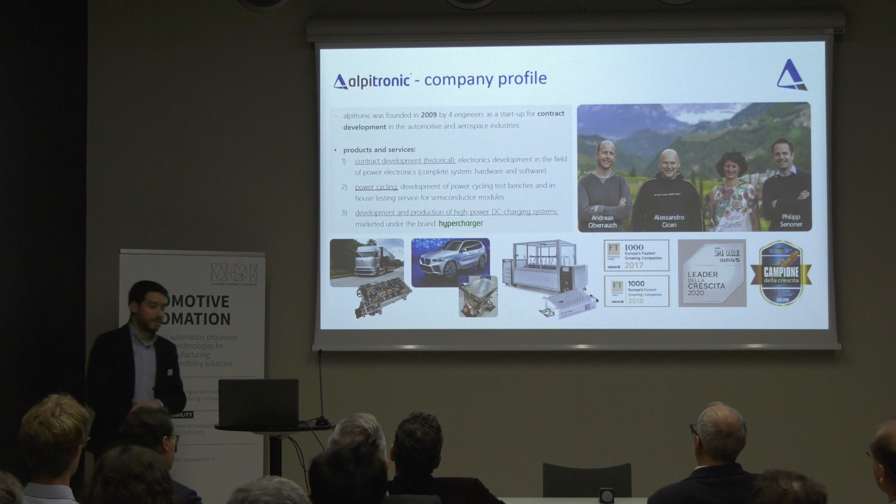Since 2017, Alpitronic is mainly focusing on the development, production, and selling of the hypercharger, which is our main product. In the meantime it became a product family - we have three different power levels: 50 kilowatt, 300 kilowatt, and 400 kilowatt. We will see that later.

We are now selling that currently all over Europe. We are now completing the certification of our chargers for the US market as well, which is why we founded the headquarters for Alpitronic US a few months ago. In Europe, of course, our headquarters is in Bozen with the production repair center and the central warehouse. All the R&D is also in Bozen, with two satellite offices, one in Munich and one in Bologna. In Bergamo, we have a remote support center as well.

Some numbers: we are currently over 800 employees. We're trying to be a 4-digit number of employees within the end of this year. As you can see, since we started the hypercharger product in 2017, more or less every year we managed to double the number of employees, mainly due to the high percentage of employees in production.

Here is a very high-level overview of our product. This is the hypercharger, which you can currently get on the market in two power ranges. One is the 300 kilowatt, which uses the old IGBT technology, and one the 400 kilowatt, which uses silicon carbide, which has been on the market for a few months.

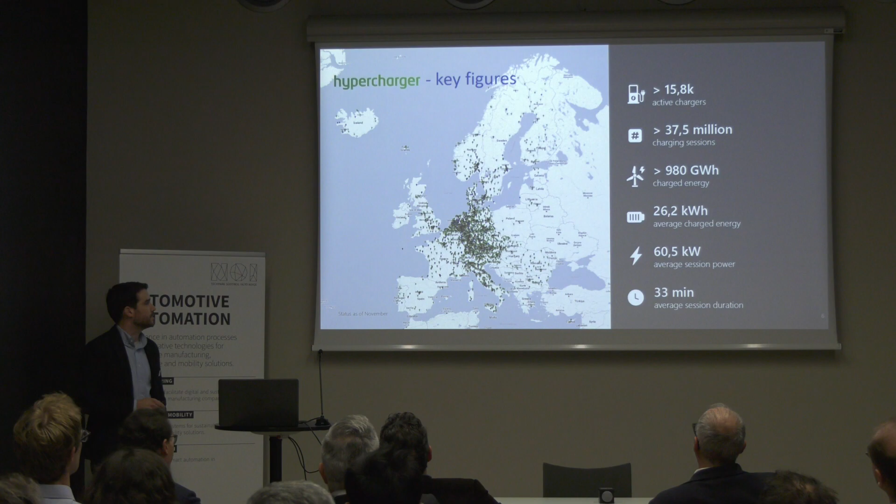I think as this slide is a few weeks old, we reached the magical number of 1 terawatt hour of charged energy since we started this adventure with the hyperchargers.

So getting to the point: thermal management. I have 3 slides on why this is important for the EV charging infrastructure, and I have 4 main reasons why the market requests a solution for efficient thermal management.

First of all, volume, power density, and weight. The market requests compact charging solutions. Space is limited everywhere, so one of our big unique selling points is that we have very compact chargers. They are, let's say, half of the volume compared to the power density of other chargers from other competitors.

And if you have a look at the physics, the 3 physical laws which define how you get the heat out of your power electronics, they all have one thing in common, which is the surface. So if you want to get smaller, you need to take this into account. If you have a certain power loss and want to get rid of it, you might think you need to increase the surface to get bigger. But if you do the math and calculate the power loss density, if you want to get rid of a certain power loss density and optimize it, you actually need to get smaller. This is the task, and this is the difficult thing in thermal management.

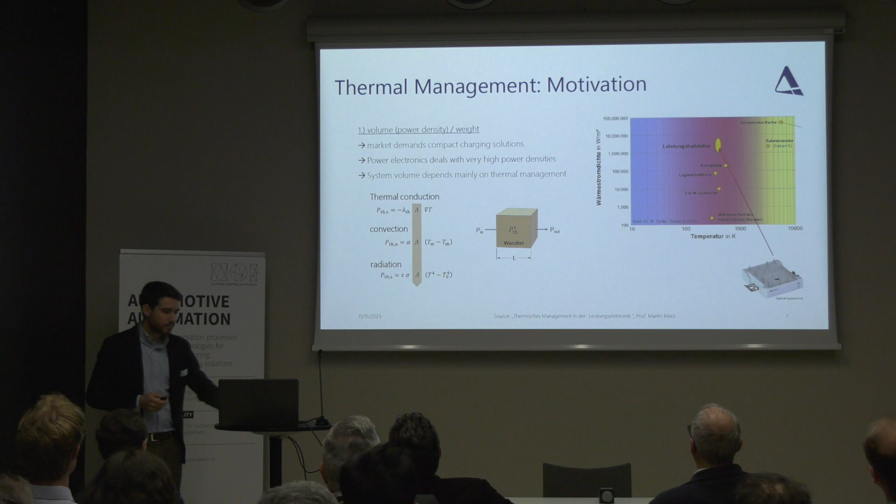Second, a very important topic for why thermal management is important is efficiency. The market demands high efficiency. Basically, our customers, which are the operators of the chargers, buy the AC current from the energy provider, and they sell DC current to the drivers. The power which is lost in the conversion is basically their operation cost. So the better your efficiency is, the better it is for our customers, the more money they can save. Now, if you have a look at most of the loss physics, you can see that losses increase with increased temperature.

This is, of course, the reason for the thermal runaway of most components. For example, the resistance of those silicon carbide transistors increases with increasing temperature. So you really need a good thermal management in order to keep the transistors cool, also in order to keep the efficiency high. And of course, what we try to follow is: the best thermal management starts with the first step, which is avoiding power losses.

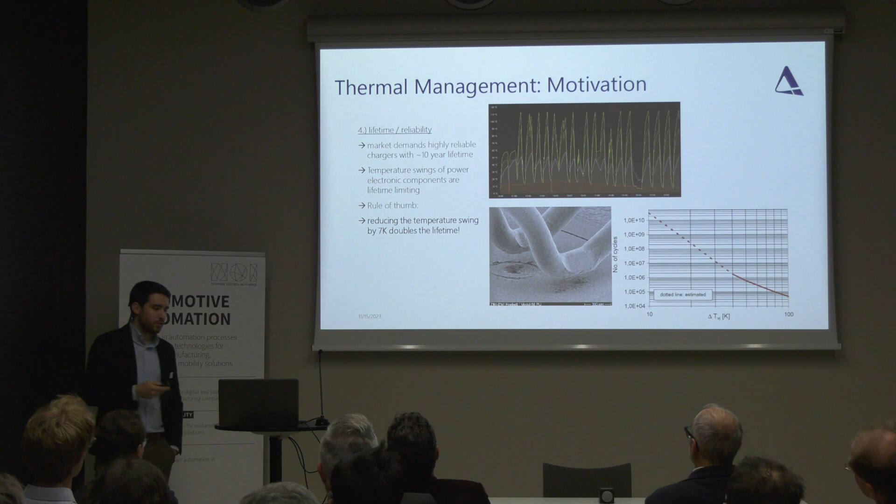These thermal swings add up and somehow limit the lifetime by defect mechanisms, such as the bond wire liftoff inside the module. I think I've seen this in a slide earlier. A rule of thumb is if you are able to reduce this temperature swing by 7 Kelvin - I think in the slide earlier I've seen 10 Kelvin - you can double the lifetime of such components.

So I try to give you a very high-level overview of how we tackle the thermal management, the thermal design of our power electronic converters. Our first step is, of course, we need to identify heat sources. So what are the heat sources? I mentioned earlier, 2/3 of the power losses are made in the power electronic component.

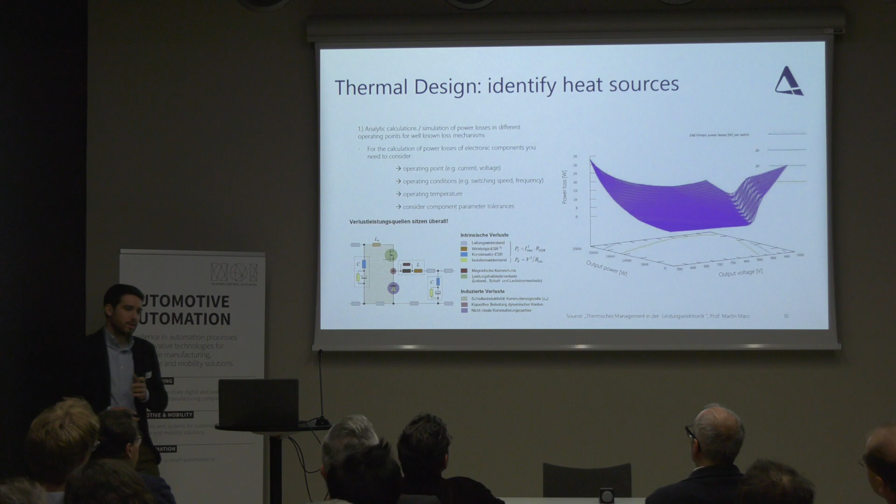Now, usually what you do is calculate, with a mix of analytical and numerical simulations, the heat or the power losses of the semiconductors for all the combinations of different operating points - in this case, output power and output voltage. You have to do this very carefully and include really all the operating points, because here you can see that for this module, the worst case operating point is not at full power but close to zero power, which means you really need to take into account all the different operating points.

And the difficult task in power electronics is, of course, the power losses which are made by parasitic components, which maybe at the moment you are designing your system are not well known. So this is something you usually identify very late in the development phase, and this usually causes a lot of trouble too late in the development phase.

This is why we usually try, at very early prototype stages, to see if our calculations, our simulations of the heat sources, also of the power losses inside the main components, if we calculated them right. And this, of course, we need to do with measurements. So we compare our simulation results with measurement results.

For example, in this case, I showed you the temperature, maximum temperature of the transistor in the different operating points. The lines are the simulated results and the dots are the measured results. And in this case, we were able to get simulation and the reality within a very, very reasonable distance.

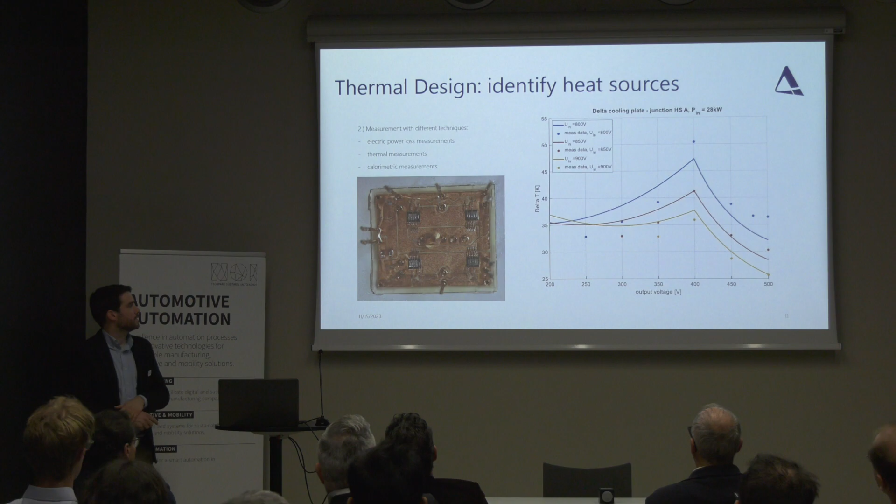And after you identified the heat sources, of course, the main task is to dimension the heat sink and cooling paths. In this case, we usually use simulation tools, in this case ANSYS, to simulate temperatures in real operating conditions.

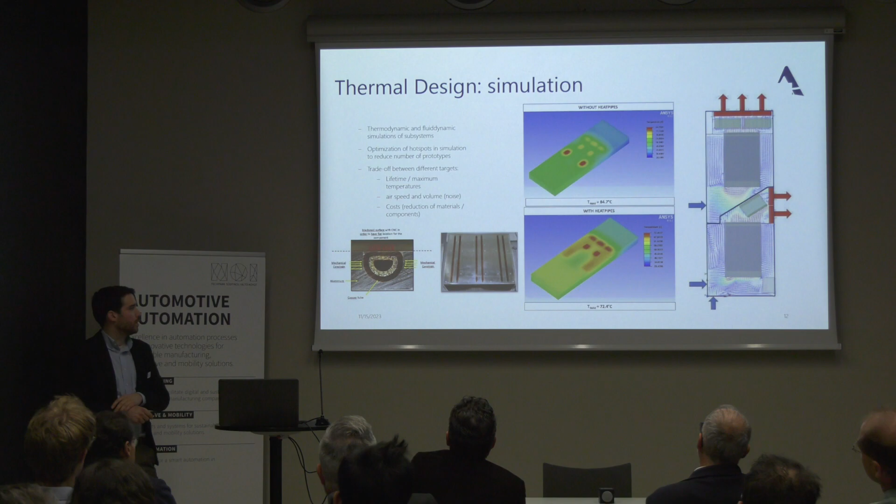What I show here is the temperature of a heat sink, and in the first simulation step we saw that the maximum temperature of a module like this exceeded the maximum allowed temperature of, in this case, 80 degrees. What we did is we introduced heat pipes, and through optimization of this design in simulation we were able to show that by introducing heat pipes we decreased the maximum temperature of the components by more than 10 degrees, which then satisfied our requirements, and with this design we then went into production.

Usually we do this with thermocouples or with infrared cameras, and these tests are then the input for the redesign phase, where you try to optimize the thermal behavior of components which exceed or are close to their thermal limit.

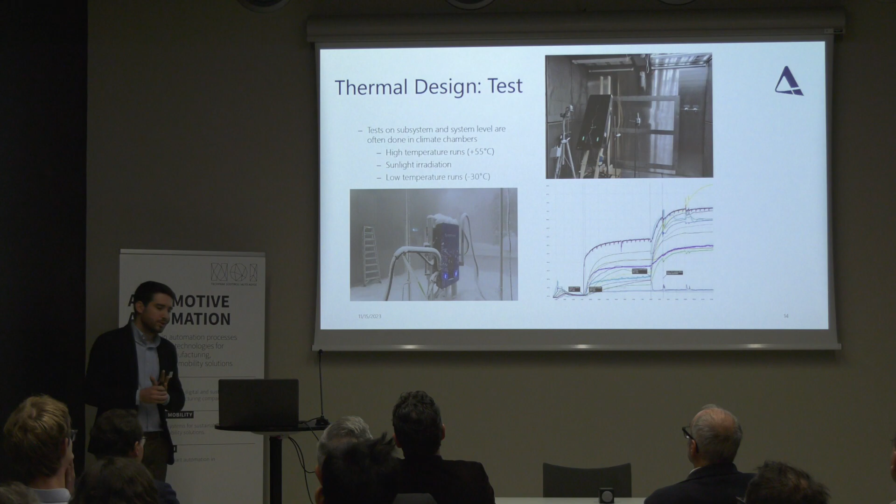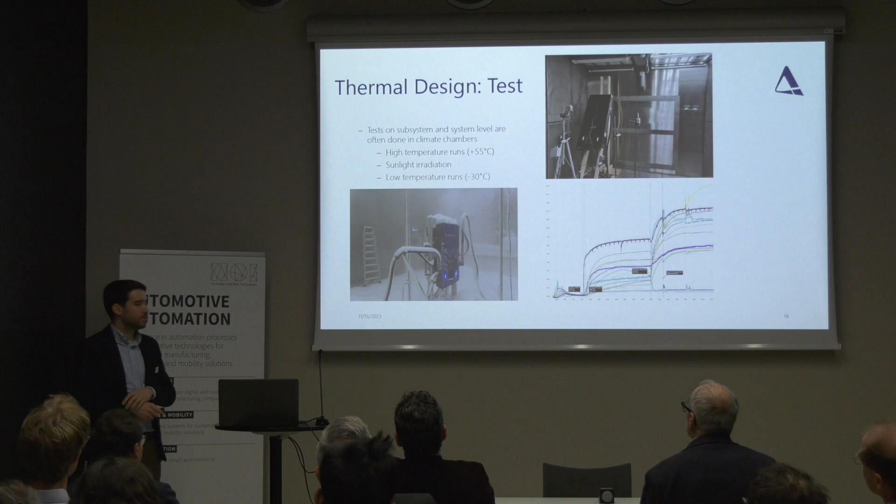This test we did in the big climatic chamber of the NOI Techpark. What usually happens at cold starts is you have to make sure that all the electronics wake up properly after a cold night, after snow, after heavy rain. This is also quite an extensive test we need to do at the end of our design phase.

I think this was the last slide.

Okay, thank you for the nice introduction. My presentation is slightly different from the others because I'm going deep down in details, and I'm going to speak about the design optimization of PCBs through numerical simulation.

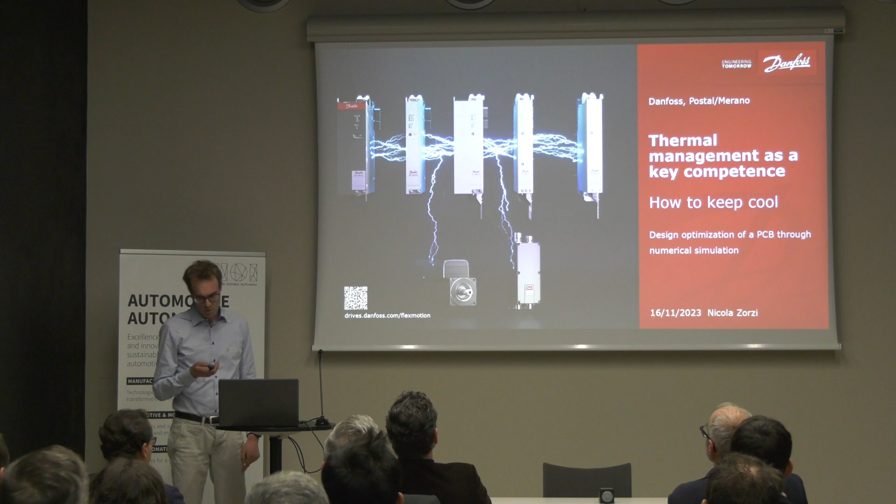But before starting, let me spend a couple of words on Danfoss. Danfoss is a multinational company based in Denmark with more than 42,000 employees globally. Danfoss has 3 segments. The first one is power solutions, which mainly designs and produces hydraulic pumps, hydraulic motors, hydraulic steering systems. The second segment is climate solutions, focused on heating and cooling buildings, designing and producing valves, compressors, heat exchangers, components for heat pumps. And the third segment is power electronics and drives.

One out of 17 factories is placed in Merano, and there we are responsible for the whole process from the idea, the concept, to the serial production of drives. We are specialized in drives especially for the food and beverage industry, different from the automotive industry, and our amount of production is more than 70,000 drives per year.

Okay, so let's go on. Let me introduce the topic and a brief introduction of the methodology we used. I'm going to speak about a problem we dealt with. This is a servo drive. This part is the motor, and this is the electronic part, in which the power board is placed. The power board could be considered the heart of the drive. In the power board, we find these two connectors here that are important for this study, because the first functional test on these drives failed due to excessive heat temperature on the M23 connectors.

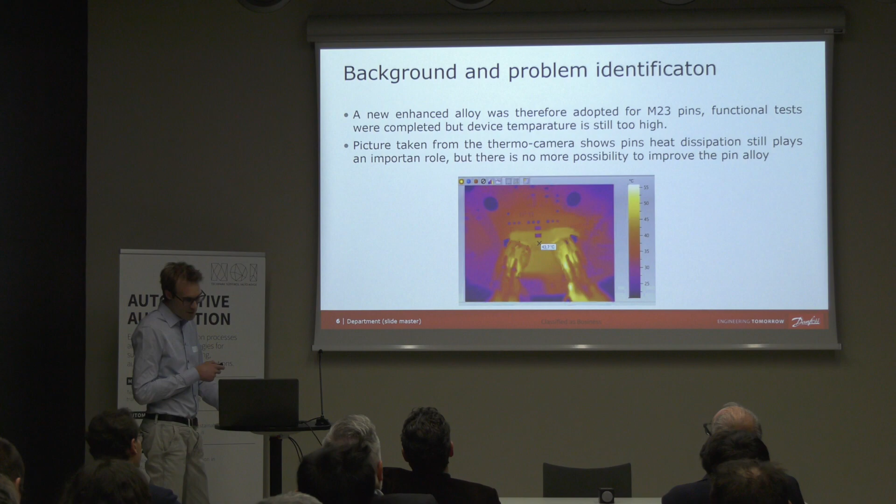Unfortunately, we have no more possibility to improve the pin alloy. So what we did, we used thermal simulation to understand the problem, to understand where the problems are.

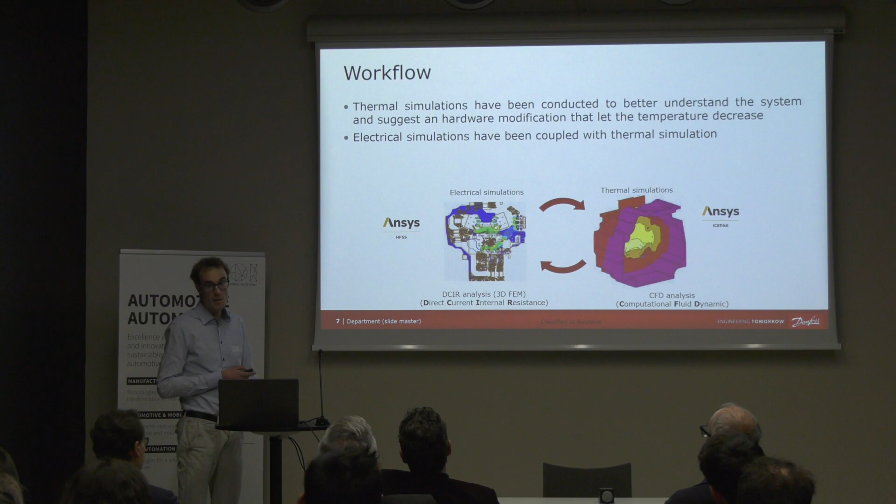And guide the design process to a temperature decrease. In this case, electrical simulation has been coupled with thermal simulation. We used the ANSYS suite for both electrical analysis and thermal simulation. We coupled these two software until convergence is reached, because for the CFD simulation we need the power loss from the electrical analysis, and the electrical analysis depends on the temperature that is an output of the CFD analysis.

This is the computational model, so we can see the various layers of the PCB. Here we can see the nets, and regarding the boundary condition, an appropriate continuous current was imposed on the printed circuit board. Regarding the computational model of the thermal side, it's possible to see the case.

So the aluminum case, this green is the power board, and this is the module. It's possible to see here in detail the module with the 6 chips that dissipate power. And this is the power board.

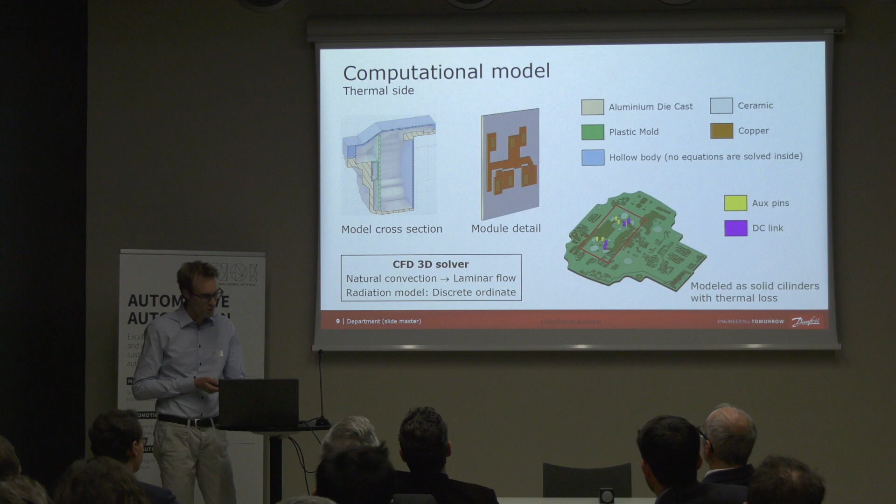And since the pins are important for heat dissipation, here pins are modeled as cylinders with thermal loss. We are in natural convection, so laminar flow was chosen, and we also consider the radiation model.

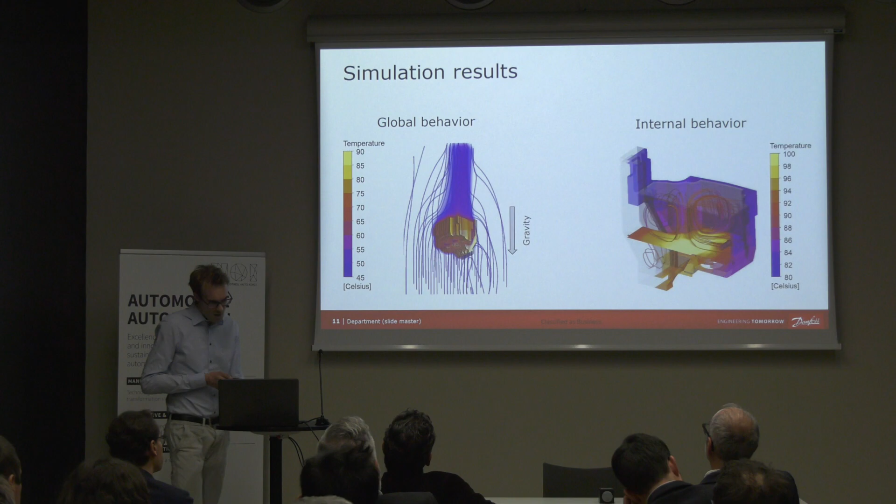And this is the output from the electrical simulation. So we can see where the problem is. And with simulation, it's possible to understand how big the losses are inside the power board.

We can see here that the losses inside the power board are comparable with the losses of the pins.

Regarding the CFD analysis, the temperature of the power board is found, and we can see how the high temperature is placed between the M23 connector.

And okay, this simulation, as I said before, the main purpose was to validate the simulation. And these in this table show the simulation output compared with the test. So we have good correlation between the two tests, so we can consider the simulation correct, and we can proceed with further improvements.

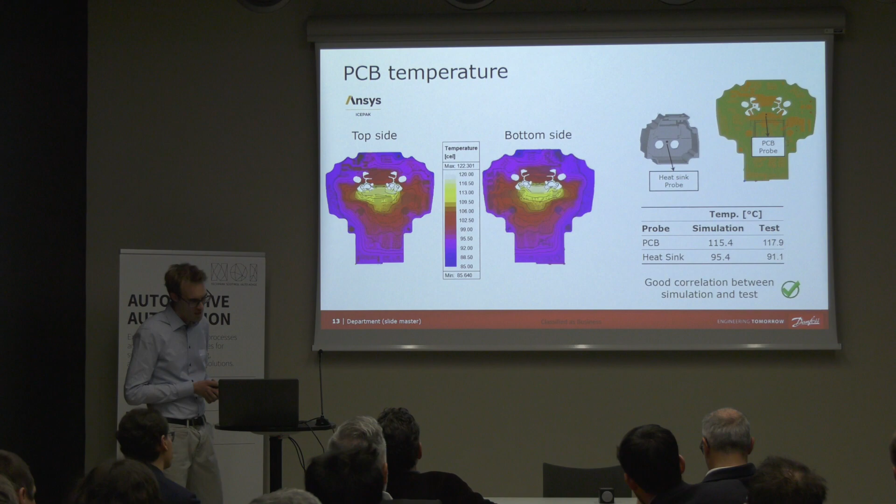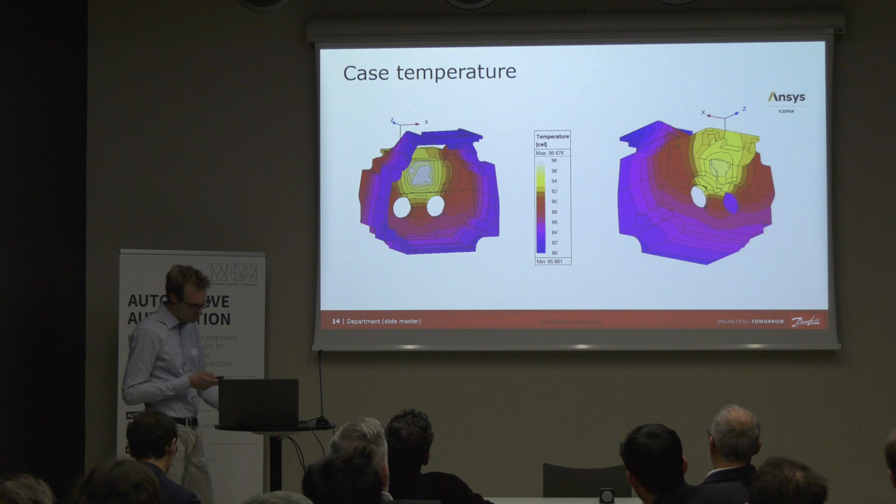So now we can proceed with improving geometry, and several geometries have been studied. In this case, to enhance the thermal dissipation, a thermal pad was placed between the M23 connectors.

So basically, these are some of the geometries we studied. The first, a small thermal pad was put, and then for version 3, a bigger thermal pad. We would like to understand

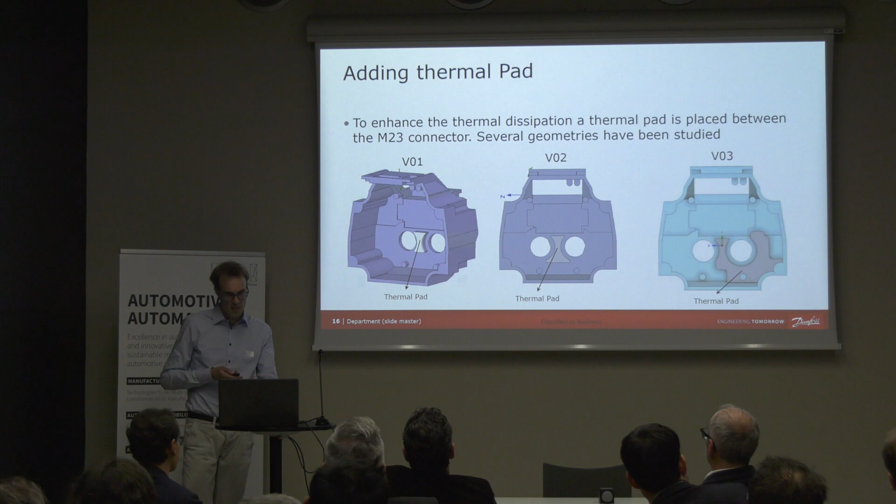the contribution of the thermal pad. These are some pictures that show the coverage of the thermal pad on the PCB. Basically, the V03 is much bigger than the other, but mainly covers the green area that does not dissipate power.

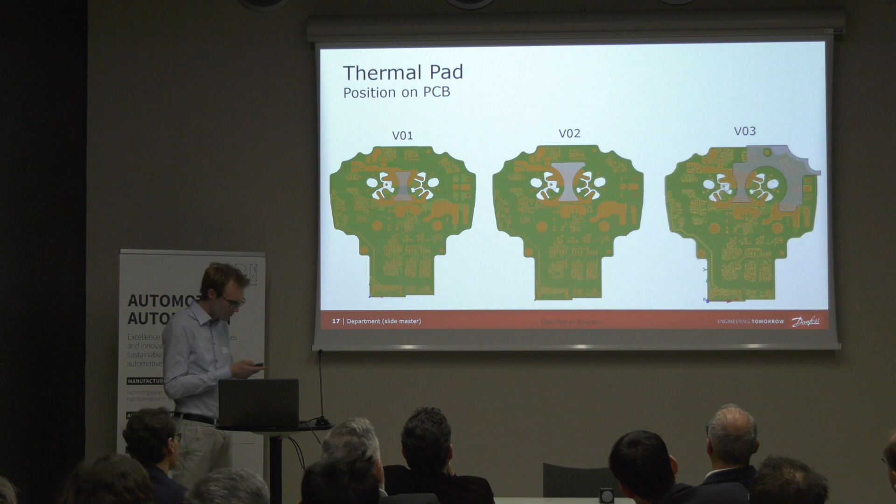Okay, here we can see the temperature of the PCB. So it's possible to appreciate how the temperature is reduced between the connectors because of the thermal pad.

So before the thermal pad we have something like 110 degrees, and now the temperature is reduced to 95 degrees, more or less.

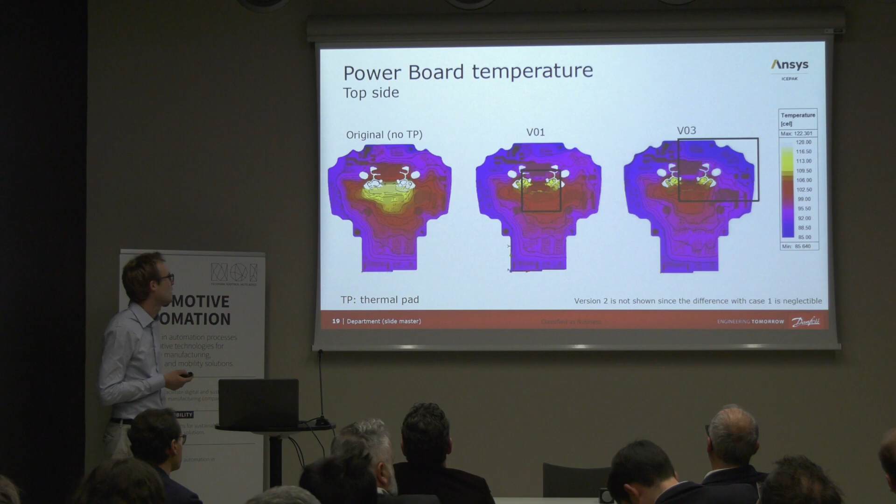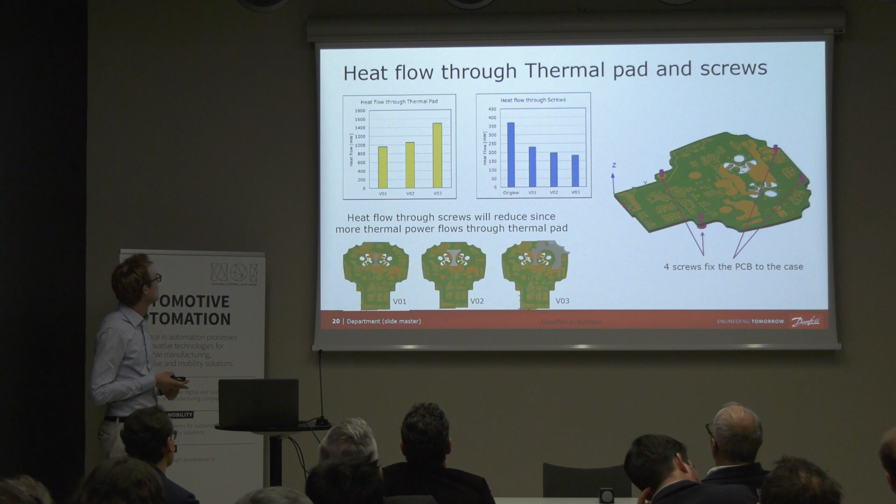Thermal analysis has the advantage of finding some quantities that are impossible to find during the test. For example, it's possible to understand the amount of energy, the heat flow that passes through the thermal pad and the heat flow through the screws.

And this was important for the next step, because as sometimes happens in this industry, after some weeks it was necessary to review the entire layout because of mechanical constraints and because of new functionality requirements.

So in this case, simulation was used to guide the design of copper traces. The aim was to conduct more heat through the screws and to design wider copper traces to transport the heat towards cold zones.

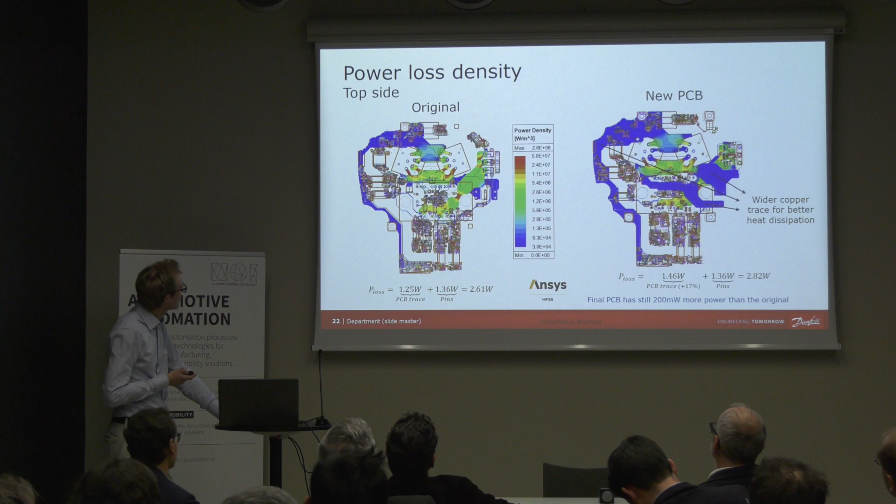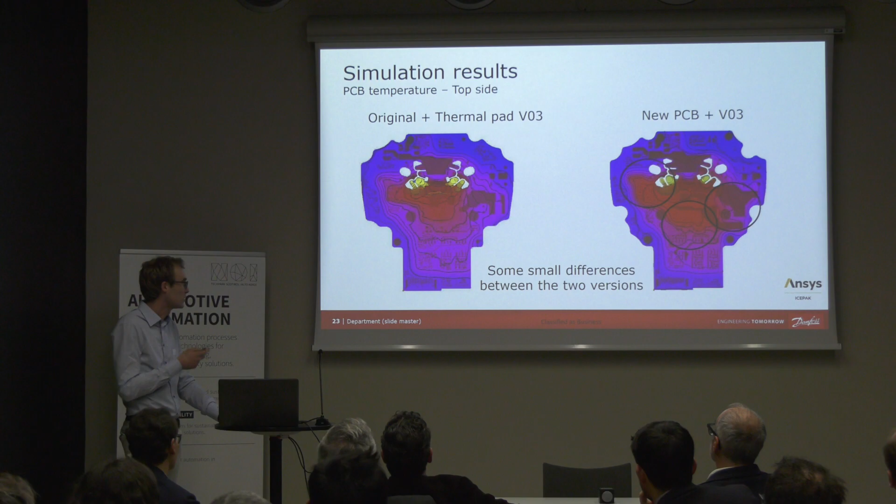The new power board has, for that new functionality, 200 milliwatts more power than the original, but as we can see in the next slide, the temperature between the two power boards is the same because of the methodology we used.

Now let me finish my presentation explaining the final test verification that checked if the simulation was properly done. So a preliminary test was carried out to verify the simulation. Preliminary because this power board doesn't have the module that is placed here, and also the ambient temperature was 30 degrees and not 45 degrees. This is because the main purpose of this downgrade is to speed up the time of the test.

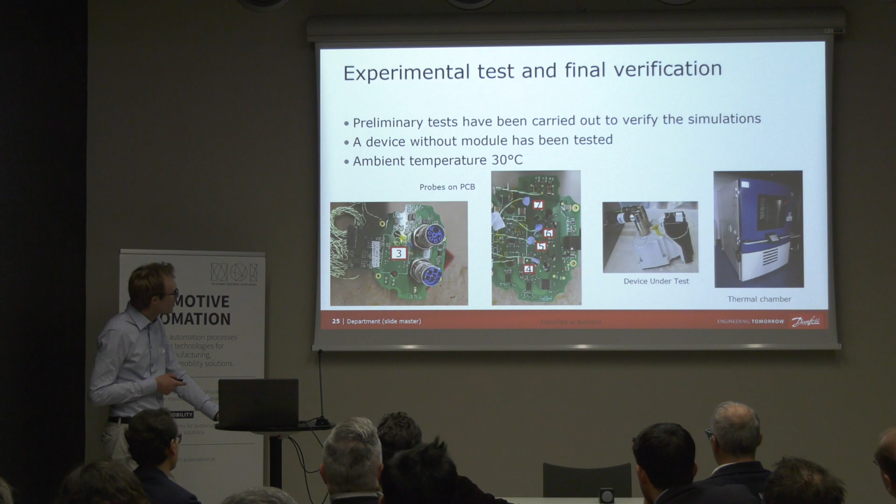So some probes were put on the power board, and this is the device. You can see here the module does not exist, and this device was put in the thermal chamber. The results were okay because the temperature reduction is about 13%.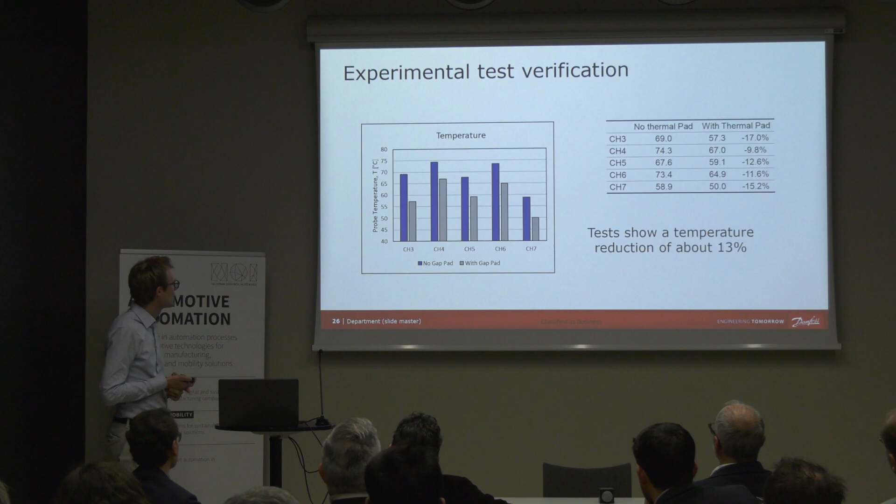So we can conclude that virtual simulation permits us to predict the thermal behavior of the device, and in this case, electrical simulation coupled with thermal simulation permits us to estimate the temperature of the new geometry, limiting the number of experimental tests and developing time. For example, for this work, 3 weeks for simulation were needed, while 1 week for the final testing.

So we can see how the simulation reduced the development time a lot. This is then my presentation. Thank you for your attention.

Thank you so much, Johannes, for your introduction. Let's talk about thermal management, but thermal management driven by simulation. How to solve the problem of thermal management and heat exchange, and optimize or improve thermal management problems.

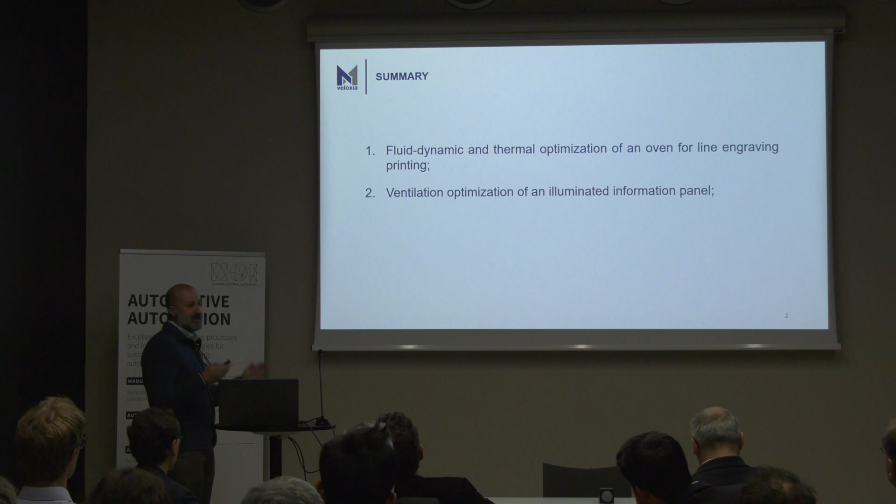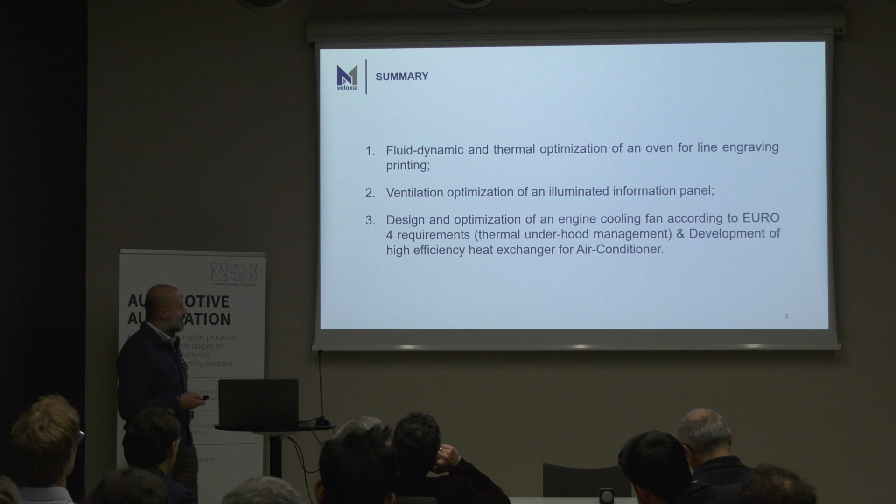Let's go on. I will talk basically about two works that I carried out in the recent past. The first, the fluid dynamic thermal optimization of an oven for line engraving printing, and ventilation optimization of illuminated information panels—the panels you see along highways, in train stations, in airports, and so on. At the end, I will talk very quickly about improvement of a cooling fan for thermal underhood management.

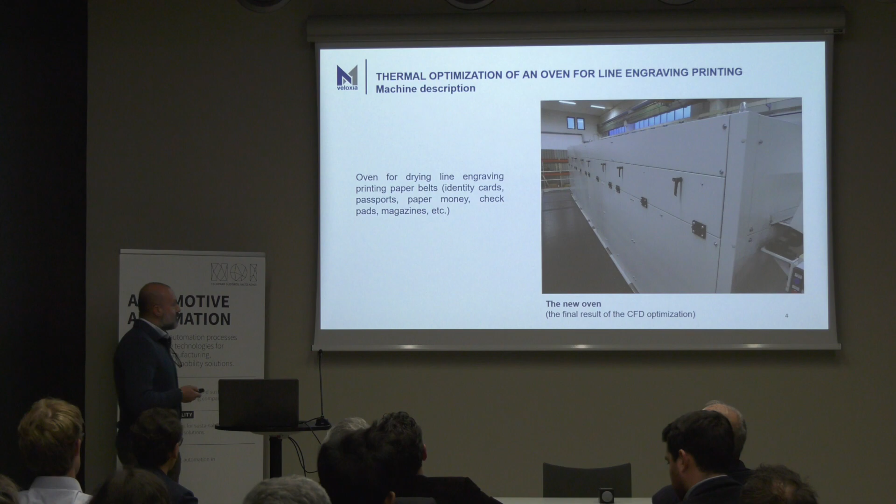Let's start with the first work. I'm talking about the oven used to dry out paper with fresh ink. Machines that print, for example, money, documents, passports, and so on have fresh ink over the paper. The paper enters the oven, is dried up, and then is wrapped up at the end. This is the final model of the oven that we worked on.

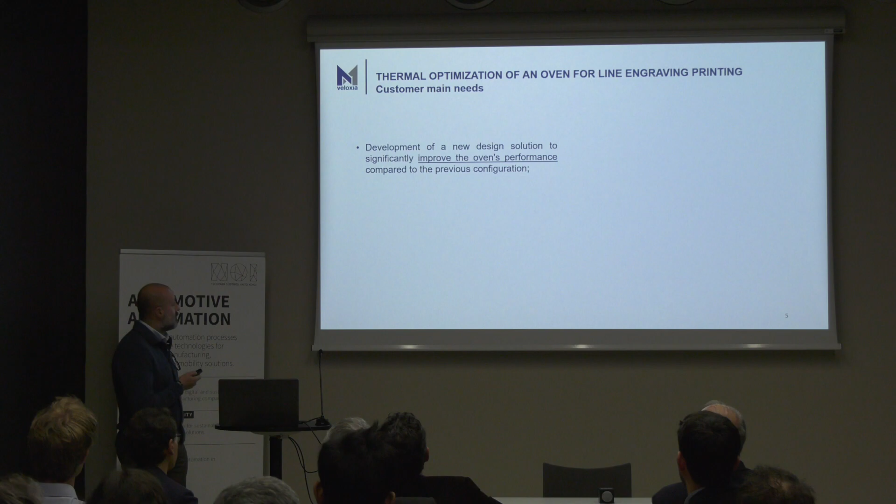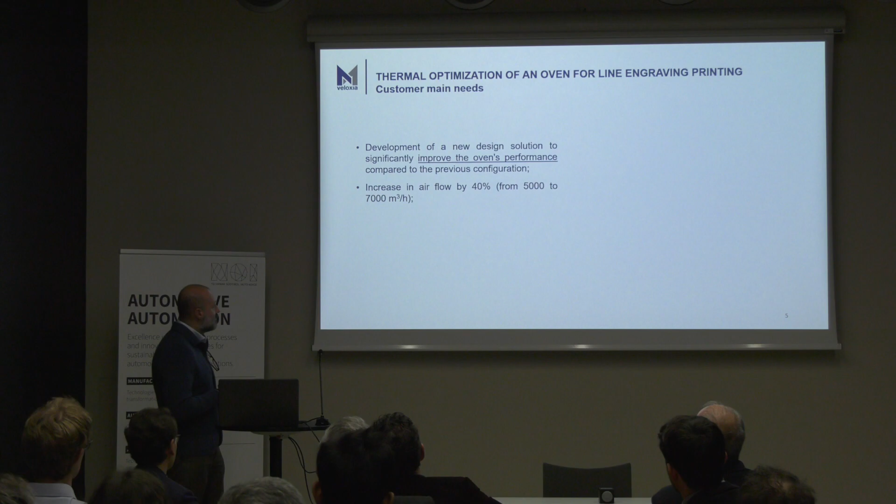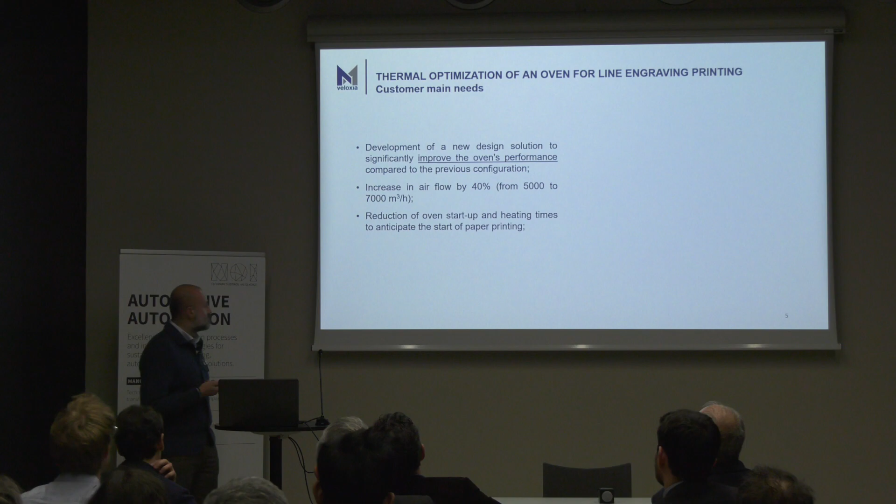What was the customer's main need, the pain point of the customer? To develop a new solution to improve the performance of the oven, because they wanted to improve the profit and performance of the machine. First, increasing the airflow rate, because they wanted to increase the speed of the paper into the oven, so increase the flow rate of hot air that has to dry up the paper, and reduce the startup and heating times to anticipate the start of paper printing.

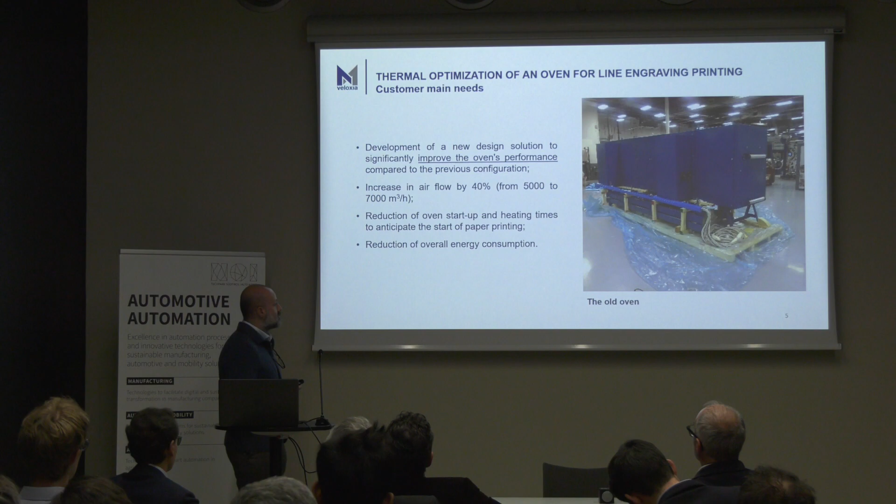At the beginning, it took about 40-45 minutes for the warm-up of the machine, of the oven. So every morning, when they switch on the machine, they have to wait almost 1 hour before starting printing, because the oven took too much time to warm up. So this was another pain that the customer wanted to solve.

Other problems included a high pressure drop of the air moving into the oven. This meant that to move the air, they needed high and strong fans with very high power absorption, and they were very noisy. Moreover, there was a non-uniform distribution of the air.

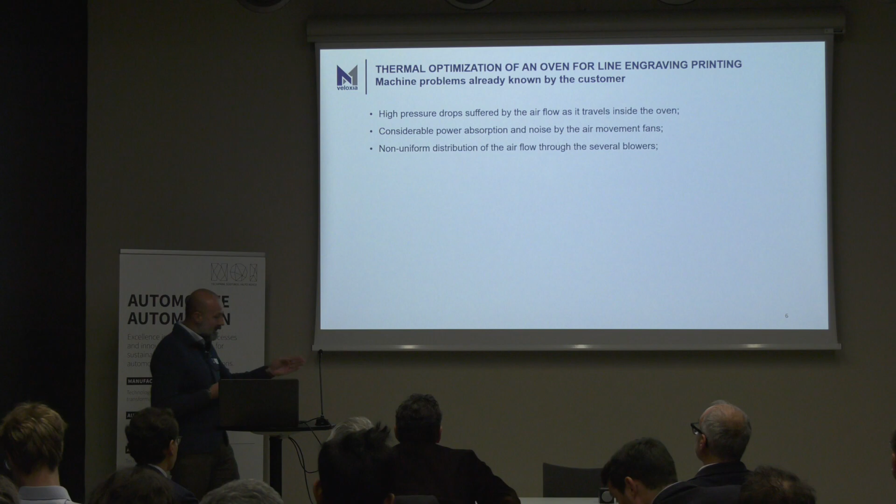The air flowed through several nozzles impinging on the paper moving in the oven, so a better distribution of the air through all the nozzles of the blowers was needed. As I told you before, there was also a long time for warm-up, and a daily delay in the start of the printing process.

So with reverse engineering, we created a 3D model of the original oven, and we created a CFD model of the machine that we analyzed.

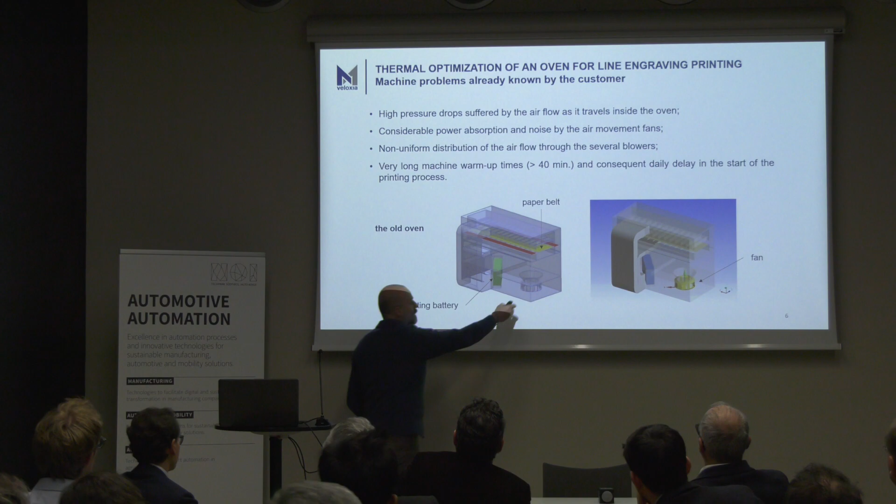What we found out, first of all, going back for a while, was a bad design of the fan that moved the air. That was a reason for the high absorbed power and the high noise produced.

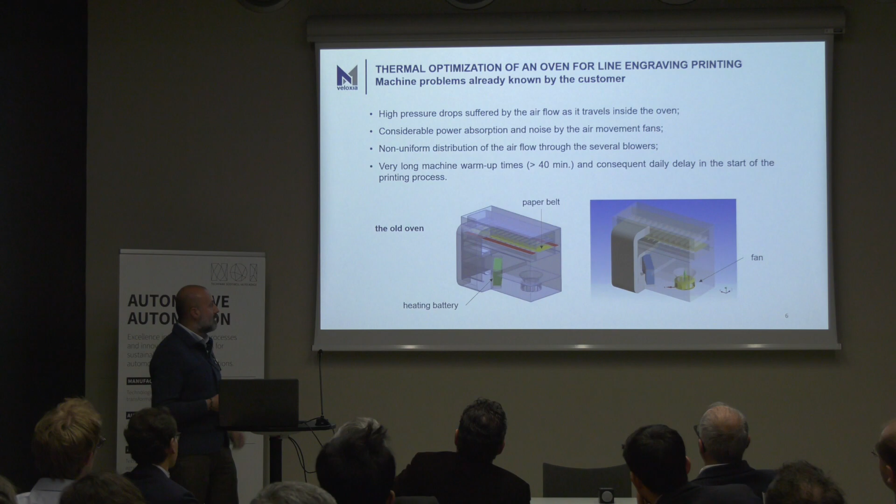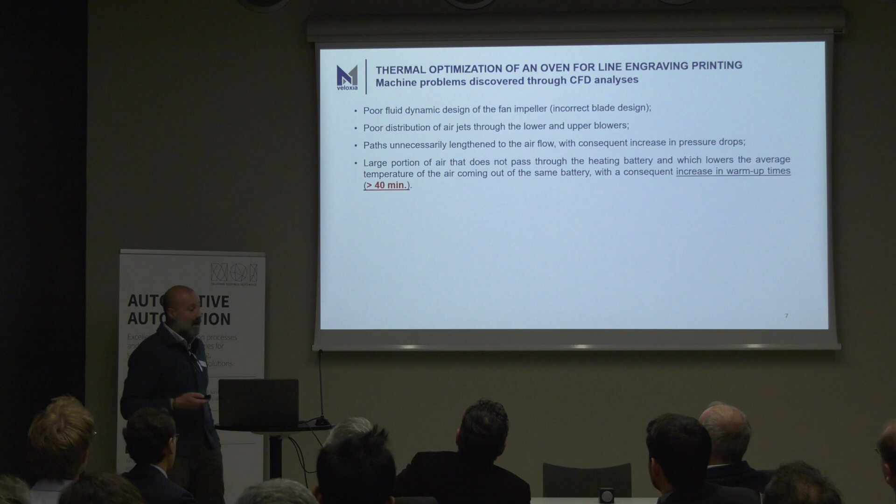And there was a path unnecessarily lengthened for the airflow. We noticed that the air took a useless path, with high pressure losses, and also high vortices and turbulence that caused further pressure losses.

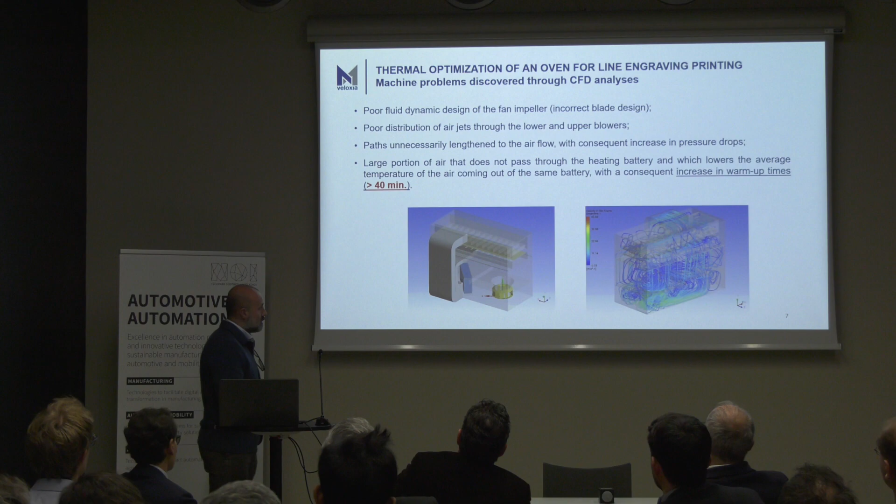We also noticed that not all the air went through the battery that had to dry up and heat up the airflow. So the original design was bad.

So what we did is we started with a new design. We forced all the air to go through the battery, so all the air at every loop was heated by the batteries.

We were able to reduce the pressure losses of the air through the oven, and so we could move a higher airflow rate with a smaller fan, with less power absorption, and quieter fans, also with a better distribution of the air through all the nozzles of the oven.

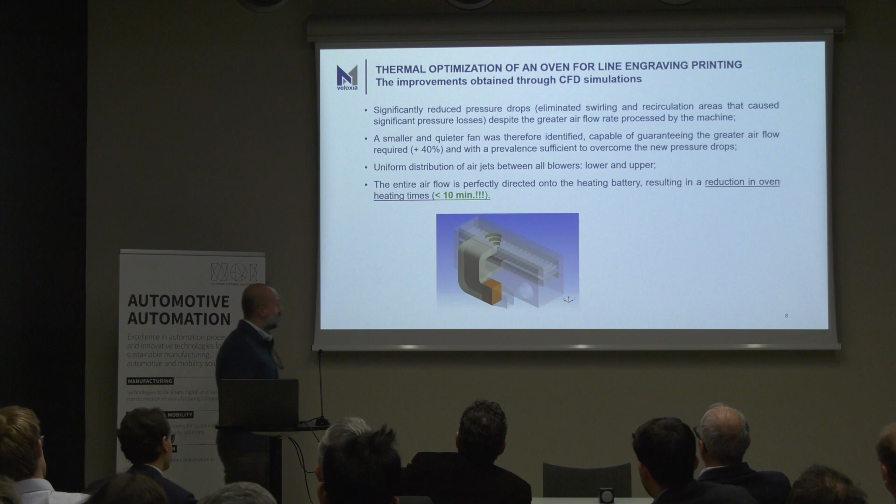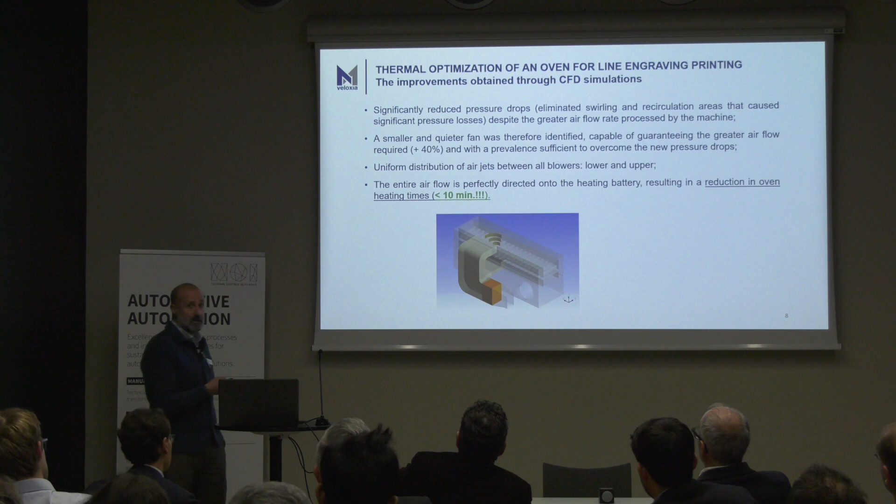We also significantly improved the warm-up times, highly reduced from 45 minutes to less than 10 minutes. So every morning with the new machine, they could start printing early.

So what we had is an anticipated start time for printing from 45 to 10 minutes, which is more than a 75% warm-up time gain.

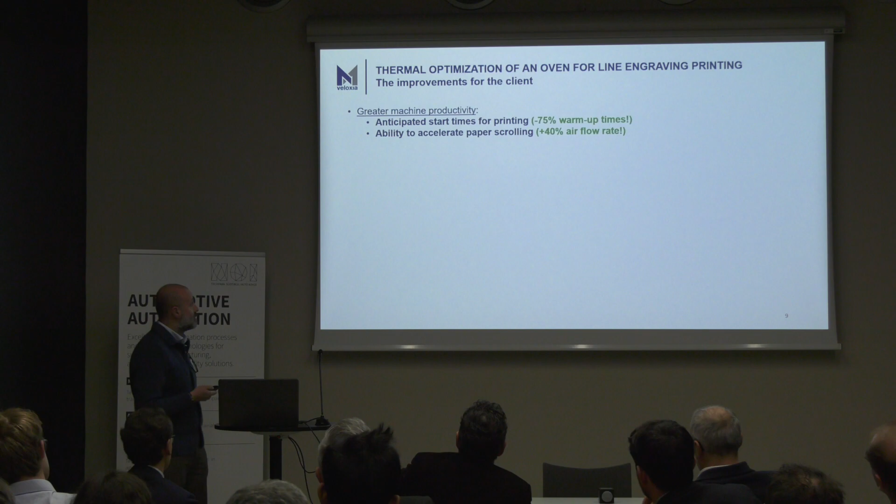There was also the ability to accelerate the paper scrolling through the oven. With the increase of the flow rate, of course, we could increase the velocity of the paper through the oven, and so we could improve the productivity of the machine.

And as I told you before, we have a significant reduction in electricity consumption cost for the fans, because we used smaller fans, and for the heating batteries. And of course, with smaller fans, it means also quieter fans, so less noise.

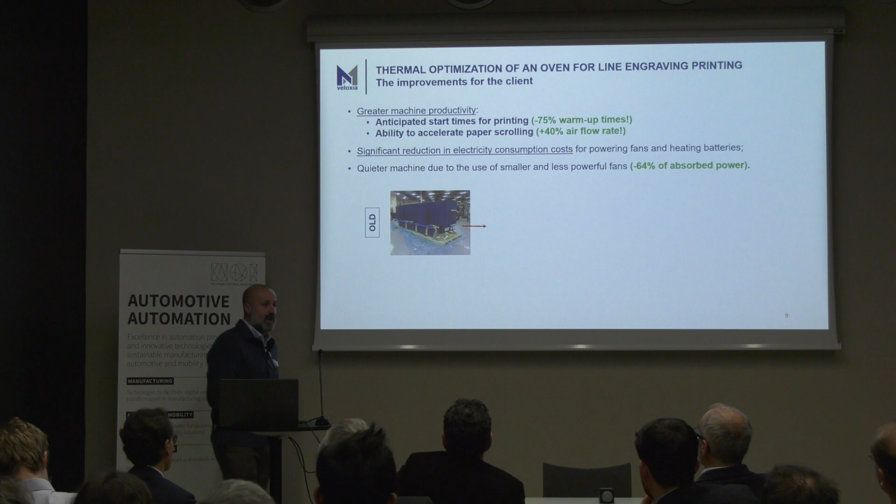So now the workers don't have to cover their ears as they did before when the machine started, due to the very high noise. This was not needed anymore.

So we started from, as I told you before, this is a small recap: the old machine, the 3D model, the CFD model, and the CFD simulation of the old design showed bad performance, so we moved to a new design, a new model.

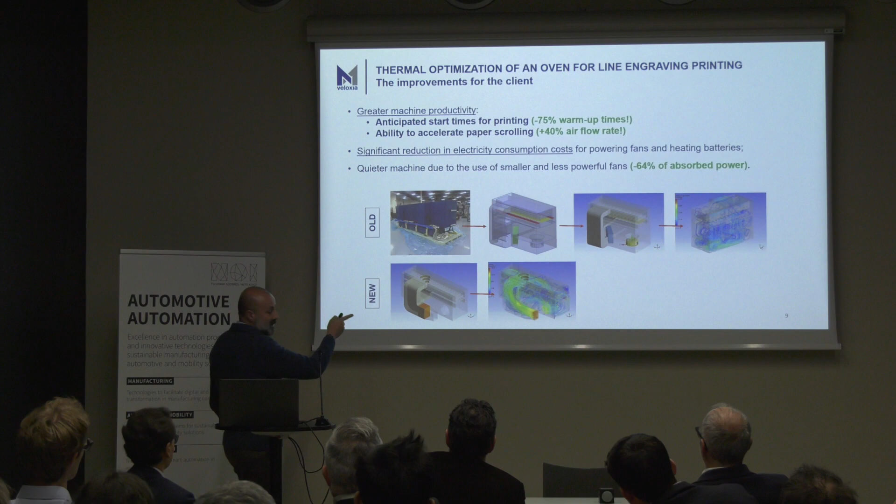The CFD simulations confirmed the improved performance, and then we realized a new 3D model, a new design, and this is the new oven that is now working fine and properly.

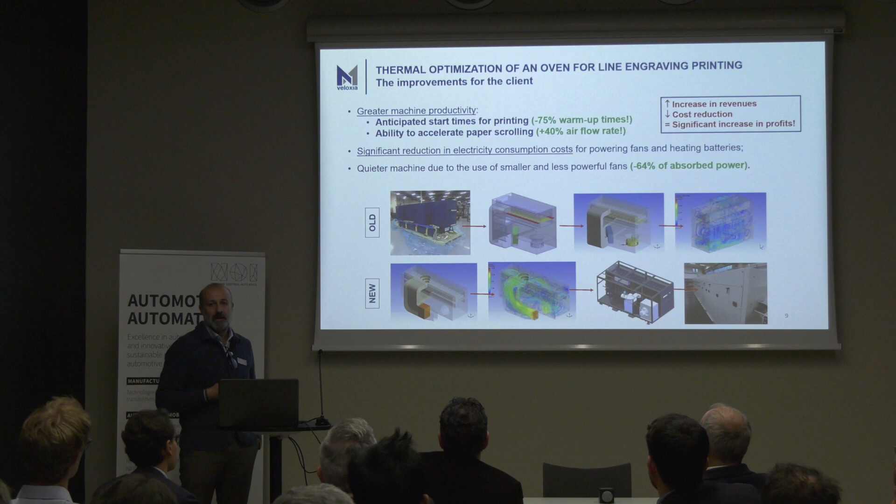Of course, these sentences and words are good for company owners and top managers who are not so technical, they are not engineers like me, but they love those words: increase in revenues, cost reduction, and significant increase in profits. So this is an important result of improvement and optimization of thermal management, but in terms of money.

The second work is the ventilation and optimization of illuminated information panels. I'm talking about those panels.

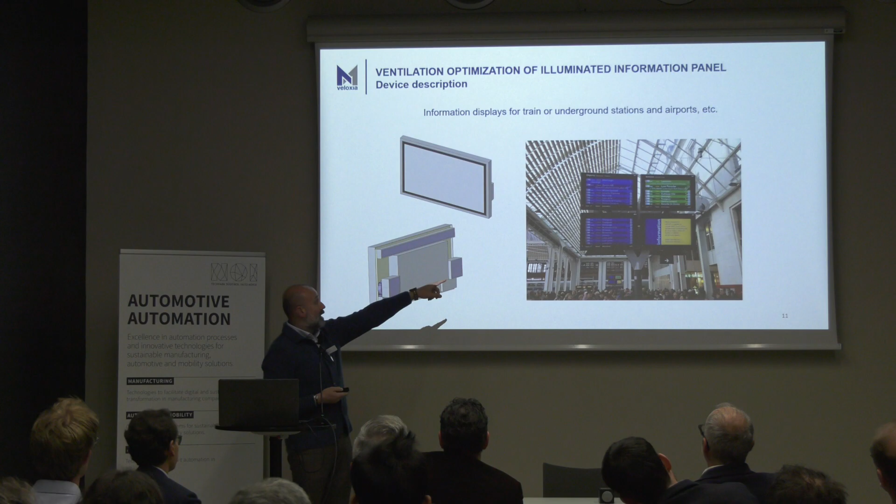In this case, what we found out: the client designed a new model of display with good resolution, very good performance, very light, and so on.

But when they tested it in the laboratory, what they found out is that the center was clear, but the sides were dark. Why dark? Because the sides were hot. And when the monitor, the display, is not ventilated very well, where it is hot, it becomes dark. And this is a problem.

They were about to sell the new display, the new monitors, in the Middle East, because they had already signed the contract. They had to stop delivering these panels, the displays, in those countries, because they first had to solve this problem.

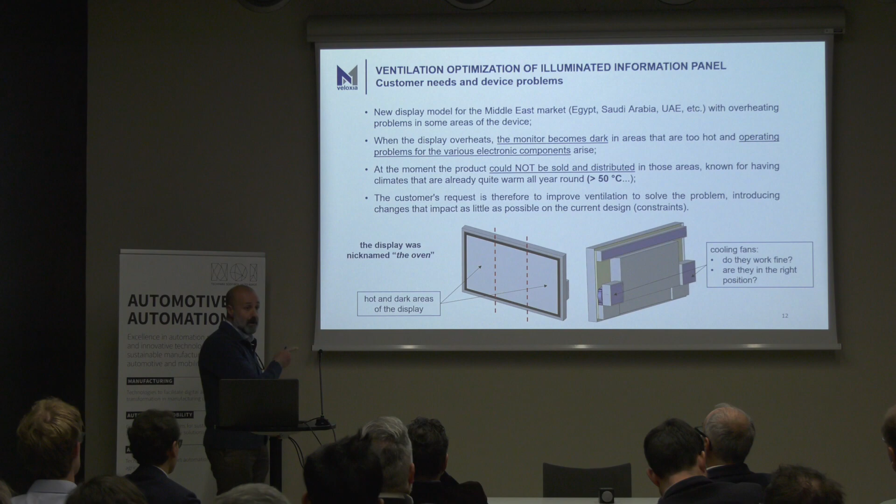And they asked me, they said, Fabio, why did we put the fan, the cooling fan there, but the sides are so dark and so hot, and only the middle is light?

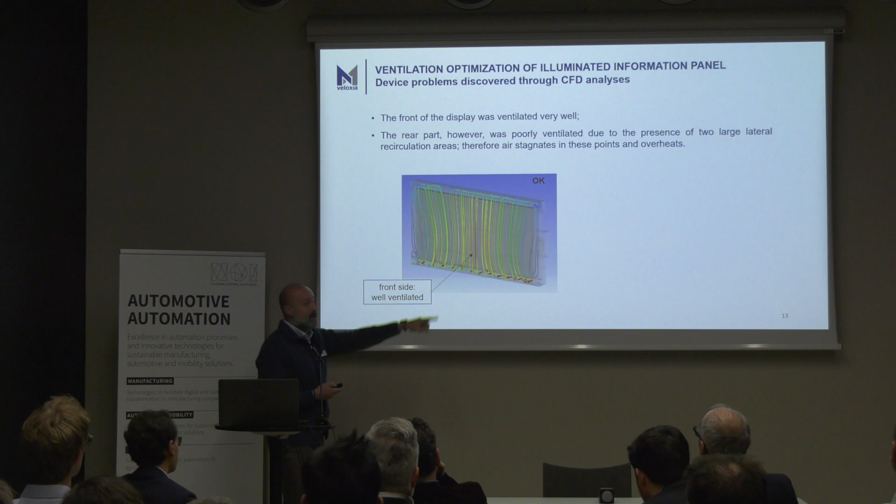So we start analyzing with the CFD simulation the panels, and what we found out is that the front was very well ventilated, as you can see, but the back was badly ventilated. In the middle, the center was very well ventilated, but the sides had these two large vortices with stagnation air.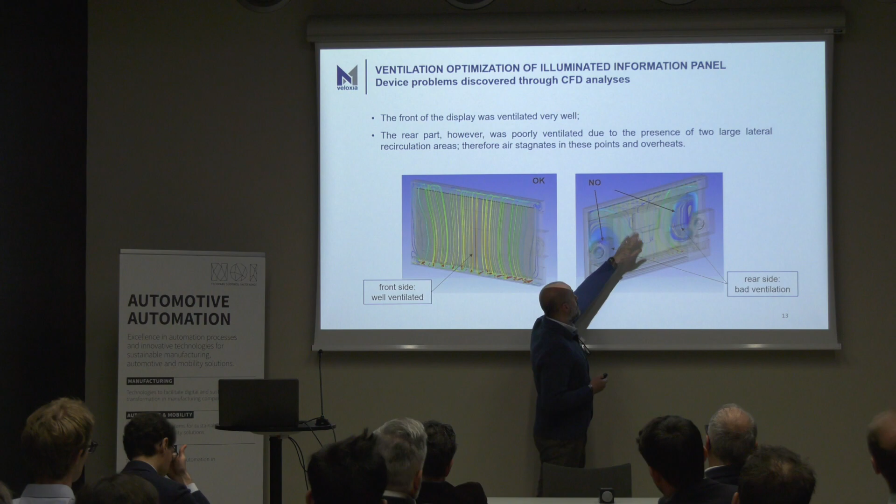That stagnation air touches the electrical components in the middle, which generate and dissipate heat as thermal power. This air touches the components and stays there, so it doesn't move from bottom to top like in the center, but stays. It becomes hot, and that's the reason why the two sides of that panel were so dark. So we discovered the reason.

So what we did is try to find a solution. But the problem is that at the beginning we had several constraints: the fan position - we cannot move the fans, they must stay there; the location of the electronic components - they are in the middle, we cannot move the hot electronic components to another place; and the dimension of the display.

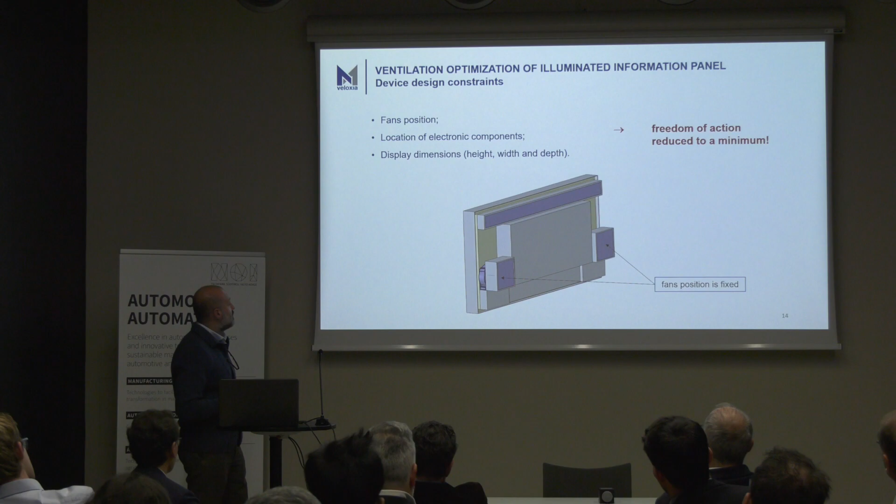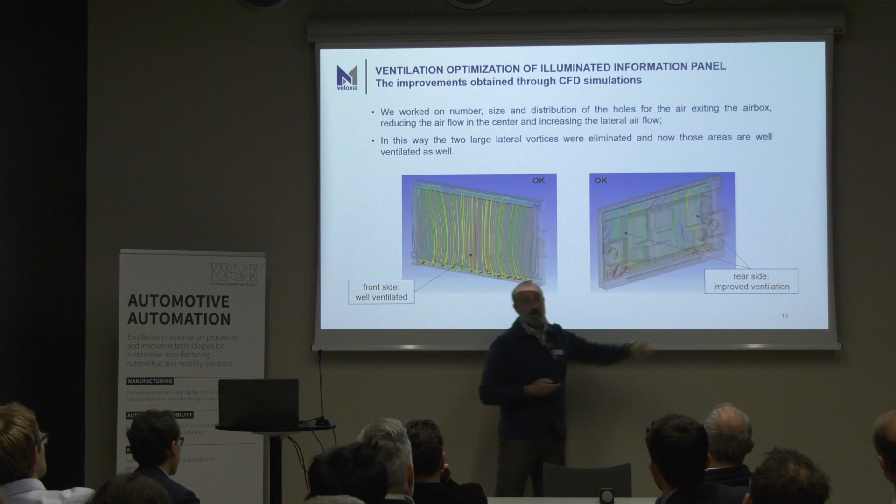So what we did is just work on the holes of the airbox, because the client at the beginning put holes only in the middle, because they said the electrical components are in the middle, we have to ventilate them very well, so let's put bigger holes only in the middle. This was wrong. So we created holes also in the sides of the back of the monitor, and this improved the ventilation also on the sides of the display. So we solved the problem, and now the display is well ventilated.

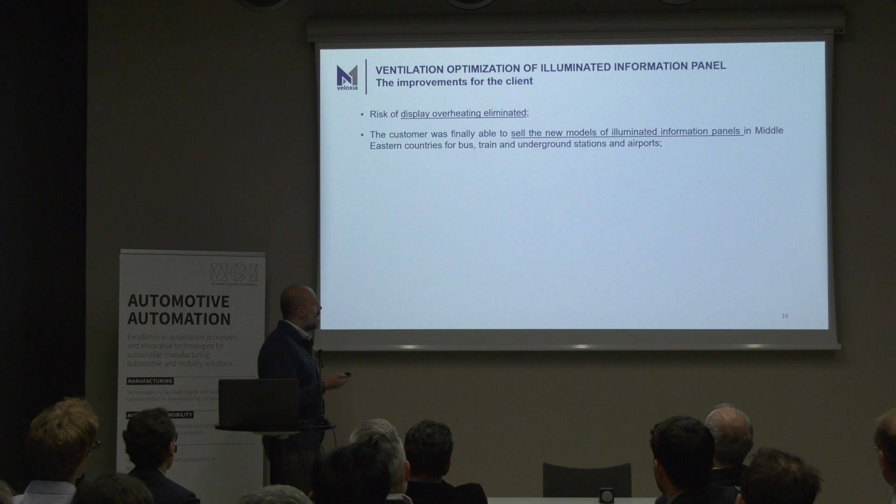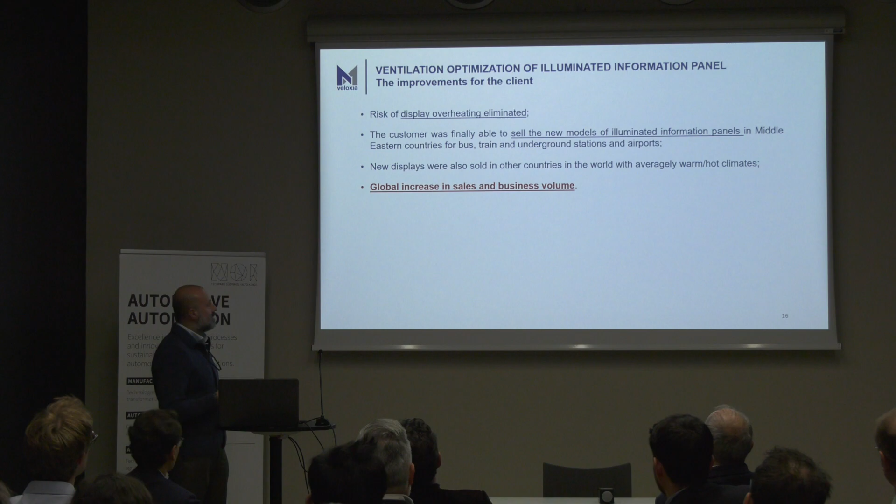So the risk of overheating is eliminated, and now the display is well ventilated and can be used also in countries where we usually have high temperatures, like Middle East countries and not only. So they could sell these panels for Cairo airport, Riyadh underground, train stations, and so on. So in this case, they could start reselling this product.

So previously we had a problem of performance, and then we improved the profits just by improving the performance. In this case, the question was sell or not sell - we solved the problem, now you can start selling. Anyway, I showed you two examples of thermal management driven by simulation, in particular CFD simulation. But of course numerical simulation is not only CFD simulation, but also electromagnetic, structural, and so on.

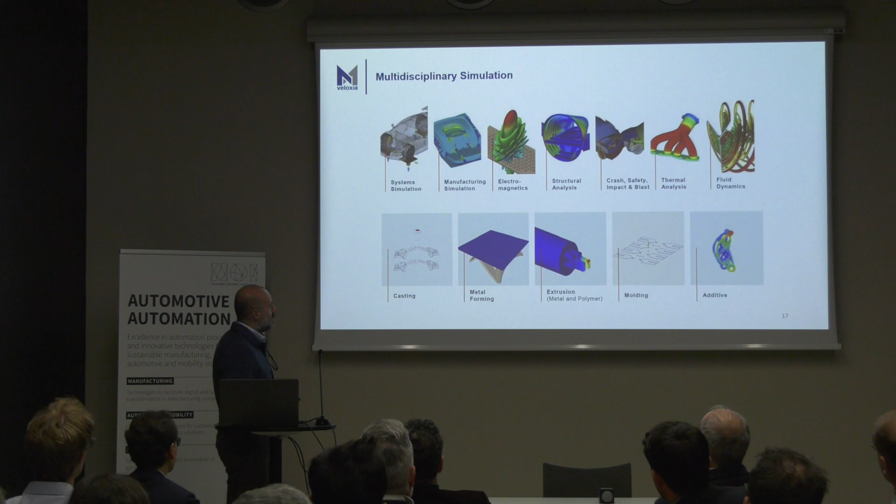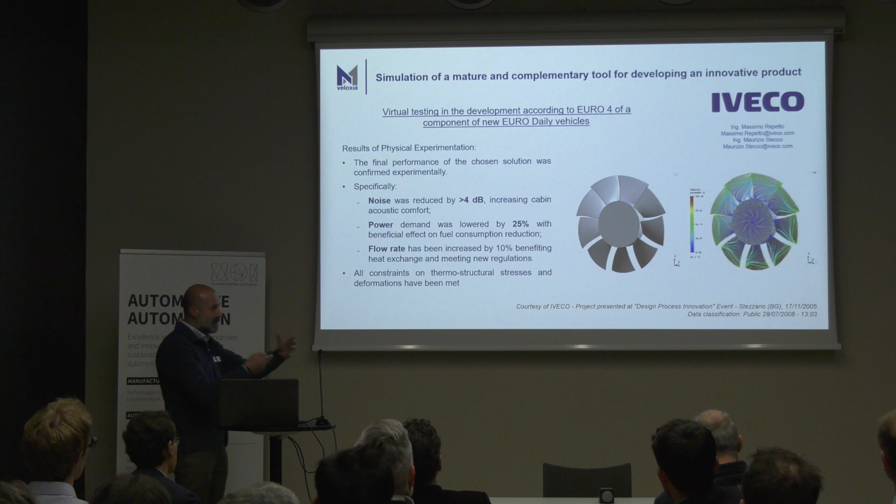This is another case we performed in the past: the improvement of the performance of the cooling fan of an internal combustion engine, which we did many years ago. Also in this case, we improved the performance in terms of noise, power consumption, and also flow rate - the amount of air needed to cool down the radiator and other components.

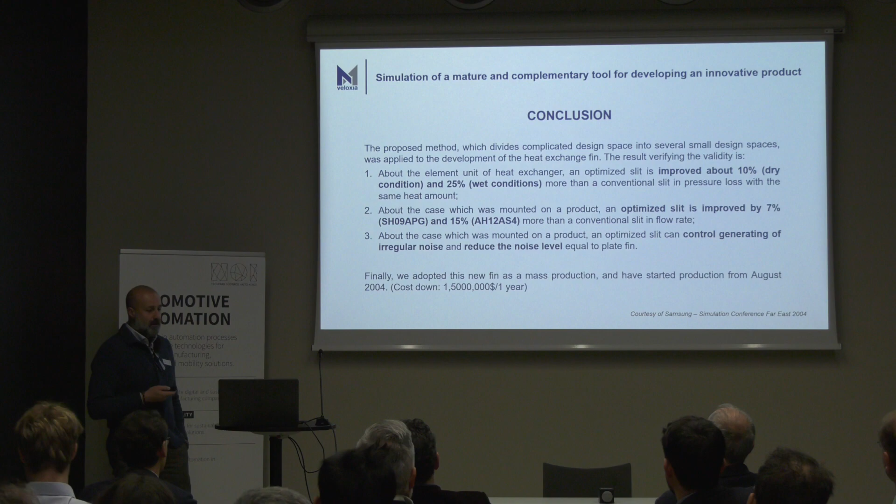This is another example of improvement, in this case of this device, always with CFD. Anyway, I don't want to waste your time. Before, I never explained how much money the improvement of thermal management was worth thanks to the simulation. In this case, the customer explained how much an optimization and improvement was worth for the customer itself - again, $1.5 million per year.

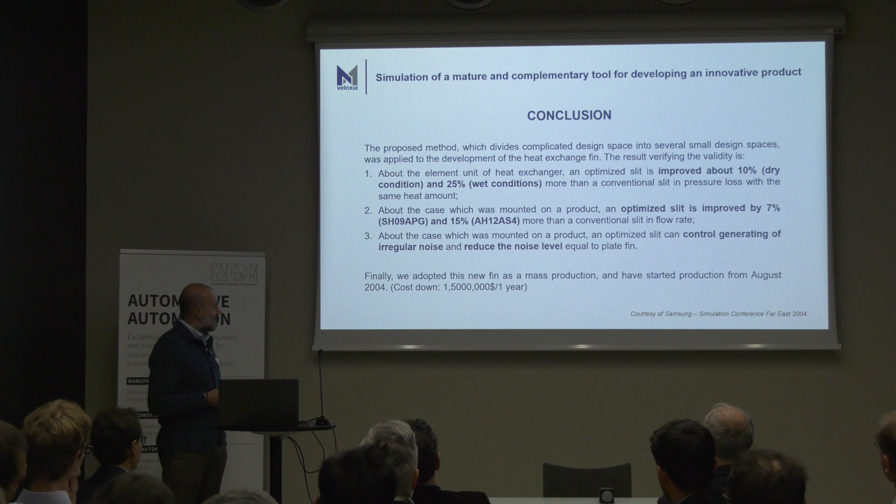Okay, I have finished. If you have any questions, I'm here.

Thank you, Fabio Zanoletti. I'm sure your customers loved these numbers and these results of your projects. Is there any question from the audience to Veloxia? No? Okay, that means you have been very clear.